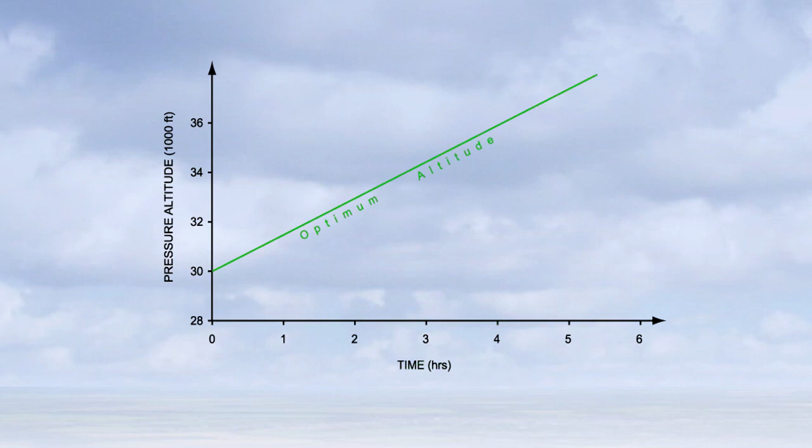Plotting the optimum altitude over time gives us the graph shown on screen. In order for the aeroplane to maximize the specific range, the aeroplane must stay with the optimum altitude as it slowly increases. Climbing in this way is sometimes called a cruise climb.

But carrying out a cruise climb is not always possible, since air traffic control restrictions and airspace congestion may predetermine flight cruising levels. If this is the case, in order to stay close to the optimum altitude, step climbs may be performed.

Step climbs essentially mean that the aeroplane climbs to about 2,000 feet above the optimum altitude and levels off. As fuel is used and weight falls, the optimum altitude will increase to a point where it is again 2,000 feet above the aeroplane's current level, but it can take up to 3 hours for it to do so.

At its current level, the aeroplane can then climb 4,000 feet and level off, so that it will once again be 2,000 feet above the optimum altitude.

But if the last step climb is within 200 nautical miles of the top of descent, then the fuel saving is negated and the aeroplane should remain level.

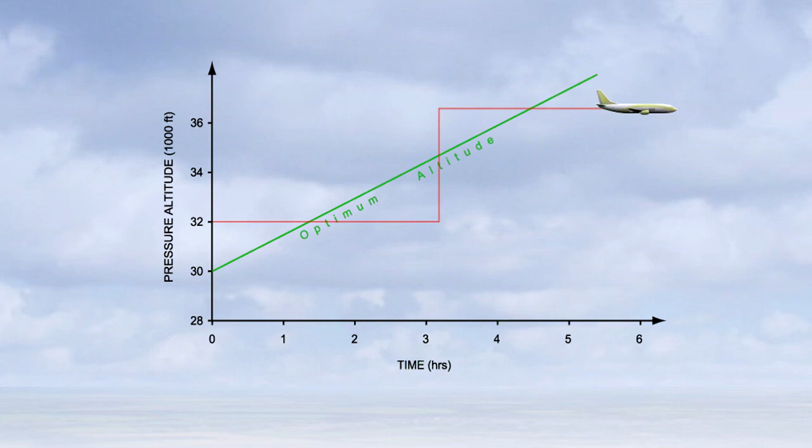The step climb process can be repeated throughout the cruise, and it helps to explain why the cruise altitudes at the end of the flight are higher than at the start.

Carrying out step climbs in this way, rather than always staying with the optimum altitude, will increase fuel consumption by about 1% and therefore decrease the maximum range by 1%. This may not sound like much, but over a year, a typical 747 would have used an extra 34,000 tons of fuel.

If an aeroplane did not even step climb and simply remained at a constant altitude during the cruise, then the aeroplane would increase its fuel consumption by 10% compared to flying constantly at the optimum altitude. This demonstrates just how important altitude and speed control are in the cruise for a typical commercial flight.

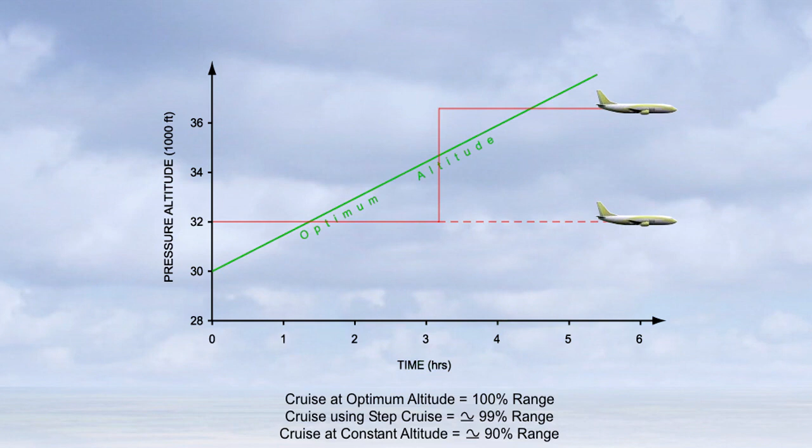Having discussed the effect of altitude on the jet aeroplane, let us now consider the effect of altitude on the propeller aeroplane. In general, we may say that most turbopropeller aeroplanes operate significantly lower than their jet counterparts. Turbopropeller aeroplanes seldom operate above 25,000 feet, and therefore never really suffer from the effects of getting close to the speed of sound.

Turbopropellers are based on the same engine design as a pure jet. Therefore, the effect of altitude on the turbopropeller is very similar to the jet aeroplane. As altitude increases, the increasing TAS and slightly decreasing specific fuel consumption help to improve the specific range.

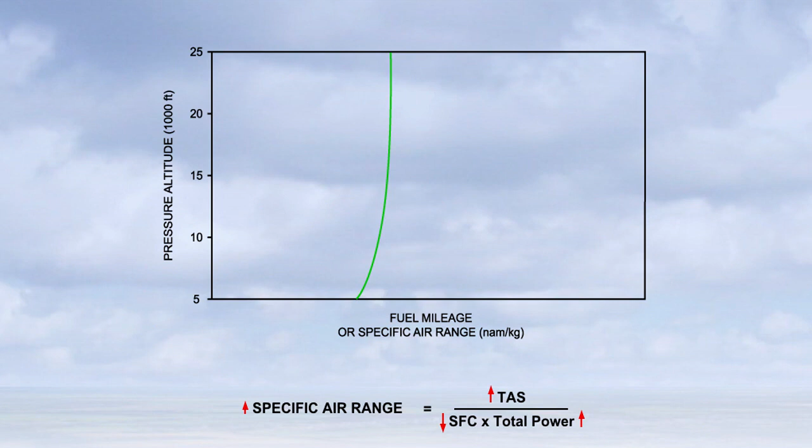However, this benefit is offset a little by the increasing power required at higher altitude. So, while specific range does improve with altitude, above 10,000 feet it only improves by a small amount. The choice of altitude may depend more on the wind considerations and the time and fuel considerations involved in climbing to the selected altitude.

The other type of propeller aeroplane is that driven by a piston engine. You will recall that the piston engine aeroplane has a more or less fixed specific fuel consumption, even though specific fuel consumption is lowest at high manifold pressures, low RPM, and with the mixture correctly set.

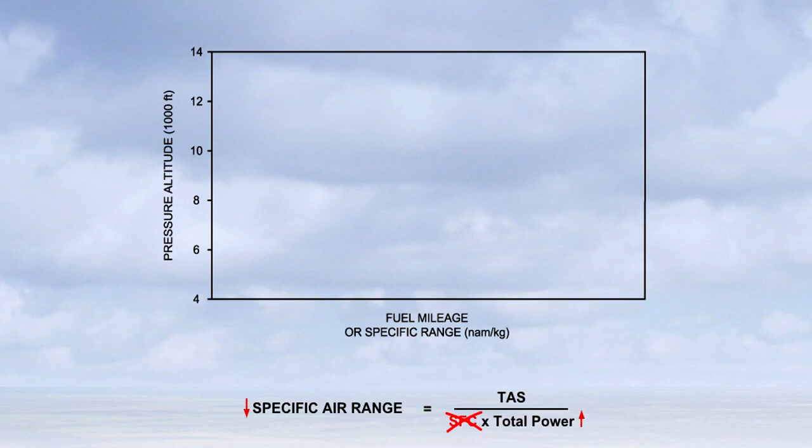Therefore, the only remaining variables in the specific air range formula for the piston engine aeroplane are the true airspeed and the power required. As the aeroplane operates at higher and higher altitudes, the power required to maintain the range speed will increase. This, of course, is detrimental to range.

However, as altitude increases, true airspeed increases for any given indicated airspeed. This fact offsets the increase of power required, and therefore the specific range slowly increases with altitude.

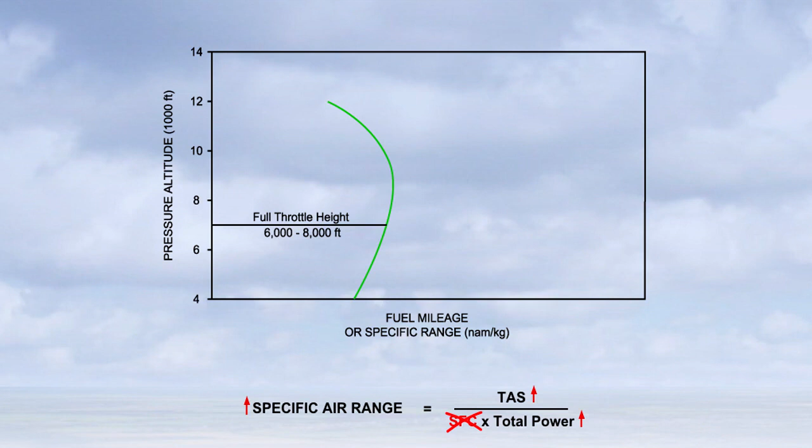However, the aeroplane will reach an altitude where the throttle needs to be fully advanced to keep the selected speed. This altitude is called the full throttle height. Beyond this altitude, the selected power and selected airspeed cannot be maintained, and the aeroplane will slow down.

Very soon after this altitude, the true airspeed will also start to fall despite the decreasing density. This fact, combined with the constantly increasing amount of power required, means that the specific range will decrease. As a result, maximum specific range will be attained just after full throttle height.

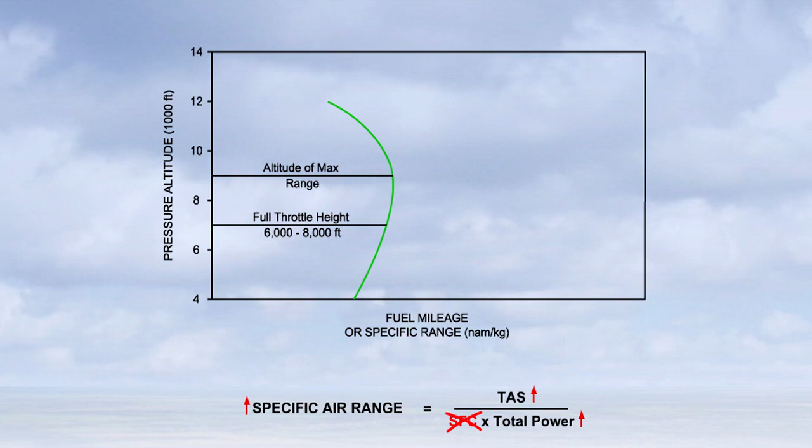The effect of headwinds and tailwinds on the range of the aeroplane can play a significant role in the choice of cruising altitude. For example, if there is a considerable headwind at the selected cruising altitude, this will be detrimental to the range. In this case, it may be beneficial to operate at a different altitude where the winds might be more favourable.

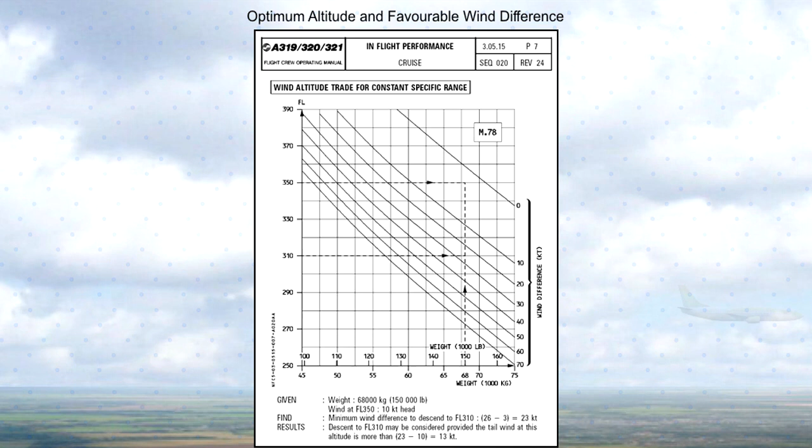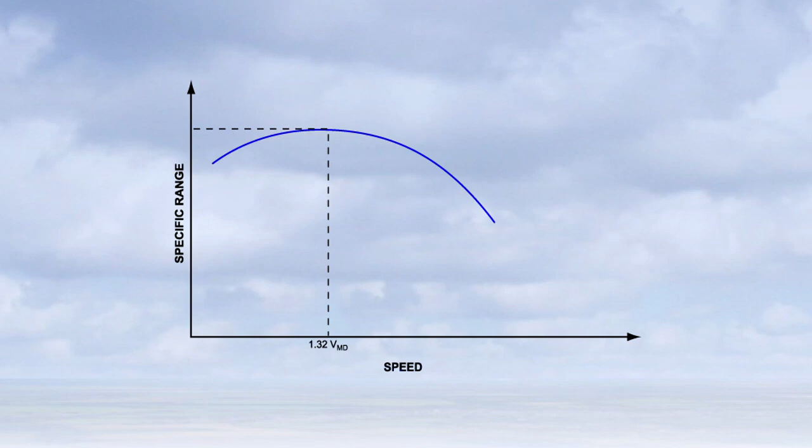The graph shown on screen shows the relationship between the speed of the aeroplane and its range. Shown here is the speed for best range, which for a jet aeroplane is 1.32 VMD. In commercial operations, this speed is more commonly referred to as the maximum range cruise, or MRC.

However, maximum range cruise speed is seldom flown. Usually, a higher speed is used. Looking at the top of the graph, you will notice the line is fairly flat. This means that a significant speed increase can be achieved with only a small compromise in range.

This higher speed is called the long-range cruise. The long-range cruise speed is about 4% higher than the maximum range cruise speed, and as such, the specific range reduces by about 1%. The reason for using this higher speed is simply that there are costs other than fuel which need to be considered in commercial operations. A more detailed explanation of the relationships of these costs and how they affect the operations will be dealt with later on.

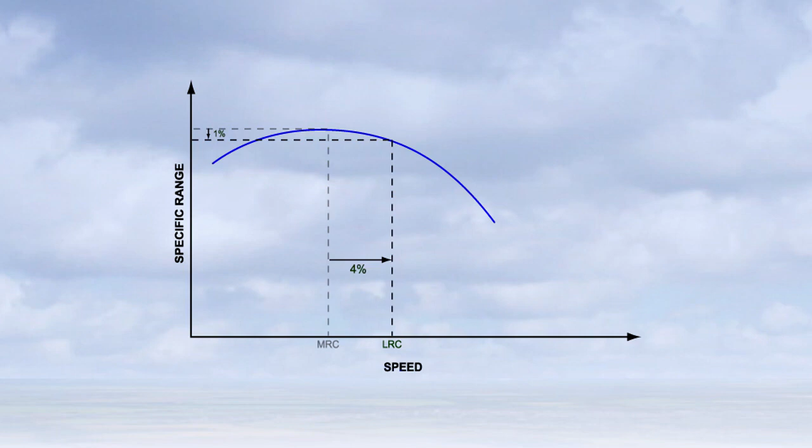This last section on the general performance principles in the cruise deals with summarizing the performance speeds using the drag and power required curves. Firstly, we will go through the performance speeds on the drag curve. You may recall that there were three reference speeds. These were VMP, VMD, and 1.32 VMD.

Since this is the drag curve, the speed on the bottom of the curve is called VMD. The other two speeds are VMP and 1.32 VMD. VMP is about 0.76 lower than VMD. 1.32 VMD is higher than VMD and is found on the tangent of the drag curve.

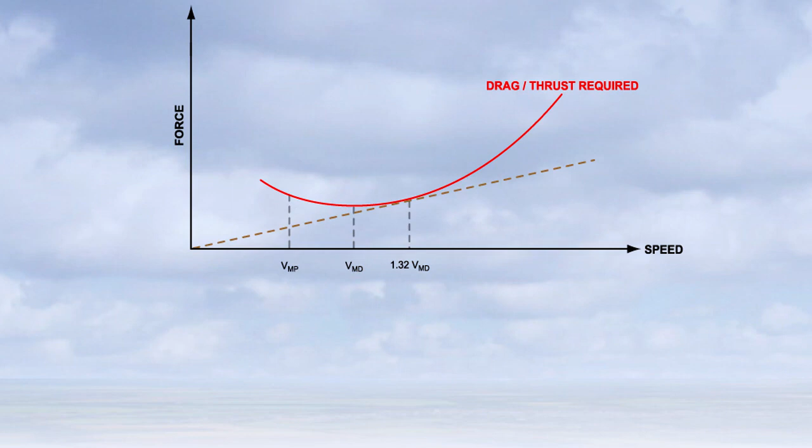These three reference speeds mean different things for different aeroplanes, and knowing which reference speed is to be used for a specific performance task is important. For example, you may recall that the best endurance speed for a jet aeroplane is VMD, but the best range speed is 1.32 VMD. Best endurance speed for a propeller is VMP, but the best range speed is VMD.

There are other speeds though. During the climb lesson we learnt that the best angle of climb speed, Vx, is for a jet aeroplane VMD, but for a propeller aeroplane it is VMP. The best rate of climb speed, Vy, is for a jet 1.32 VMD, but for a propeller aeroplane it is VMD.

Lastly, during the descent lesson you learnt that the speed for the minimum angle of descent, or best glide speed, is VMD, and the speed for the minimum rate of descent is VMP.

It's obvious that so many speeds may cause confusion to students. Placing the speeds together in this way helps you to see where they are in relation to the three reference speeds and in relation to one another. What is equally important though is for you to have a tool which you can manipulate to give the desired results. This is what the graph aims to provide.

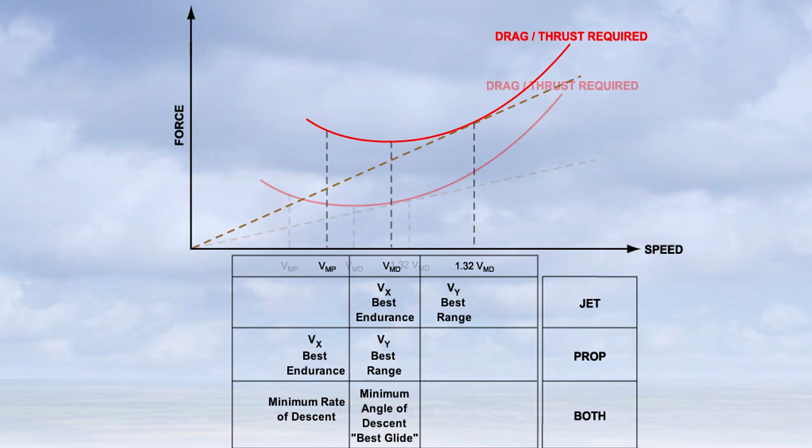You may remember that as weight increases, the drag curve moves up and to the right. This means that not only drag is increased, but also all the performance speeds are higher. The reverse is true as weight is decreased. The drag curve moves down and left, showing that drag decreases and the performance speeds are lower.

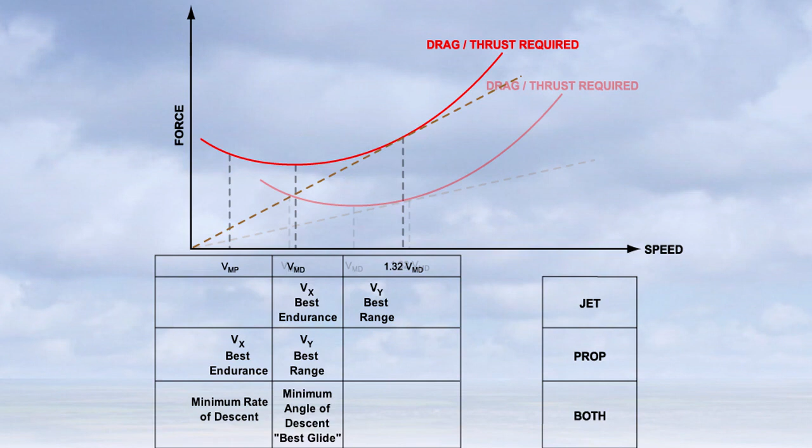As gear and flap are deployed, the drag curve moves up and left, showing drag increases, but the performance speeds are lower. Retracting the undercarriage produces the opposite effect. Drag decreases, but the performance speeds are higher. Using the graph in this way, we can simplify a lot of the material that you need to learn.

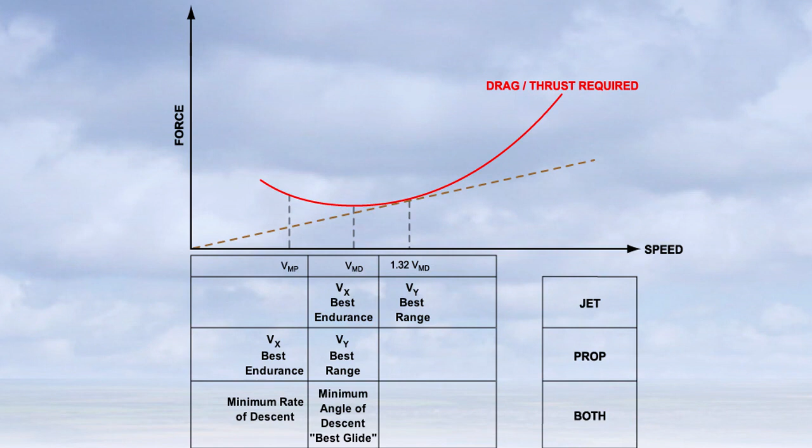Just as in the previous section where the performance speeds were shown on the drag curve, we can do the same with the power required curve. Firstly, the three reference speeds need to be identified on the graph.

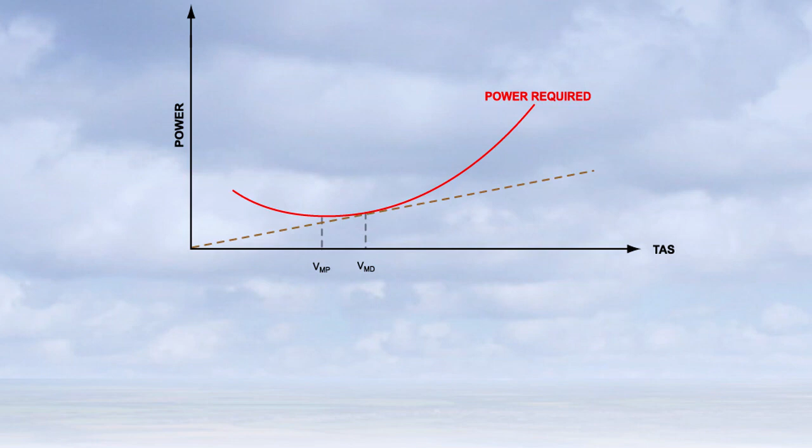Since this is a power required curve, the speed at the bottom of the curve is the velocity of minimum power, VMP, as shown. The next speed is VMD. This is slightly higher than the VMP and is found at the tangent point on the power required curve. The last speed is 1.32 VMD and is shown here.

It is now possible to place the performance speeds we described in the previous section beneath the relevant reference speeds. Doing this completes the placement of all the speeds on the power curve for both jet and propeller aeroplanes.

As before, the power curve can be manipulated to show the effect of certain conditions, giving you a tool to solve basic problems. Increasing weight will move the curve up and right, therefore showing the increase in power required, but it also shows that the performance speeds are higher. If weight decreases, then the reverse is true.

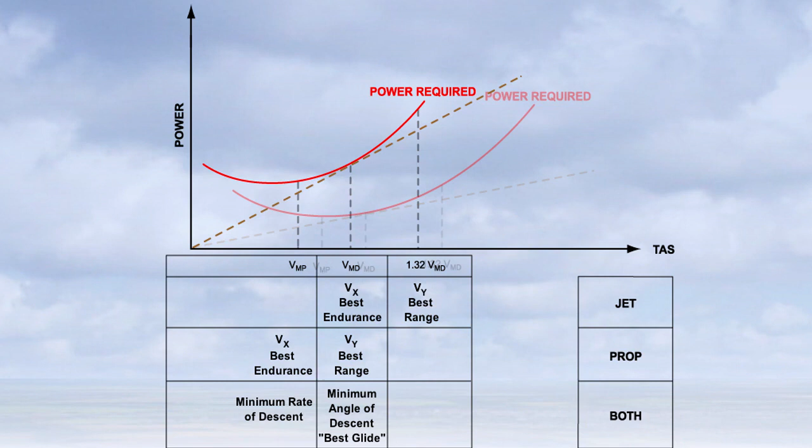Similarly, with the deployment of flaps and undercarriage, the curve will move up and left, showing that the power required increases, but the performance speeds reduce. Again, the reverse is true when the gear and flaps are retracted.

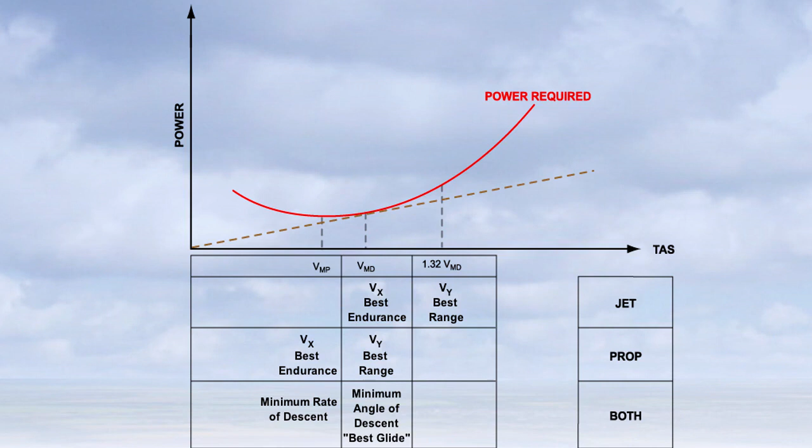Hopefully from this demonstration, you can see the importance of using a graph for the reference speeds. The principles you have learnt form a large part of the requirements of the ATPL examination, but more importantly, these principles will allow you to make accurate and informed decisions in routine flight management, and especially in emergency situations where your training becomes a vital safety cushion. This completes the lesson on the general performance principles in the cruise.